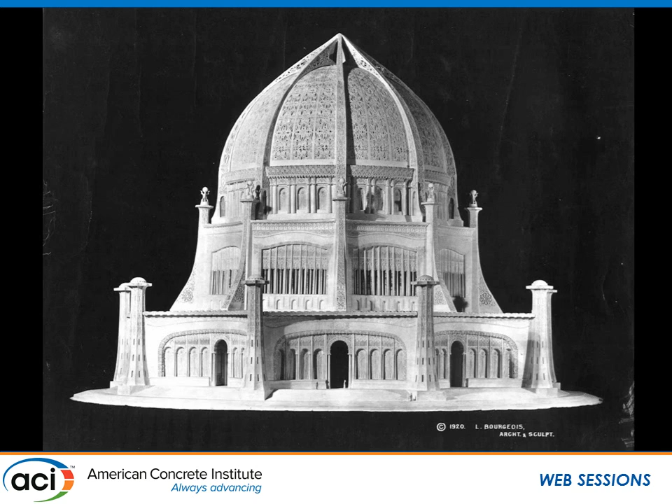Well, they had an international competition. Now, there were less than 1,500 Baha'is in all of the United States 20 years later when construction began, but that meant nothing to this very bold group. They said, we'll have an international design competition. And this model, 10 foot tall, was one of the submittals.

Louis Bourgeois, who was a French-Canadian-born architect trained in Paris, took 2 years to build this because he didn't think his drawings conveyed his idea. What he designed was a single high domed space with light streaming in during the day through tens of thousands of filigreed openings and then out again at night from lights within.

Now, it reminded me a little bit, when I saw Lorado Taft's photographs in his smock at dinner, his artist smock. Louis Bourgeois was much the same, artist, architect, and so his photographs have him in the artist's smock and so on. But John Earley would have greeted him at the door of his studio in his artist's smock because John Earley was a practicing architectural sculptor.

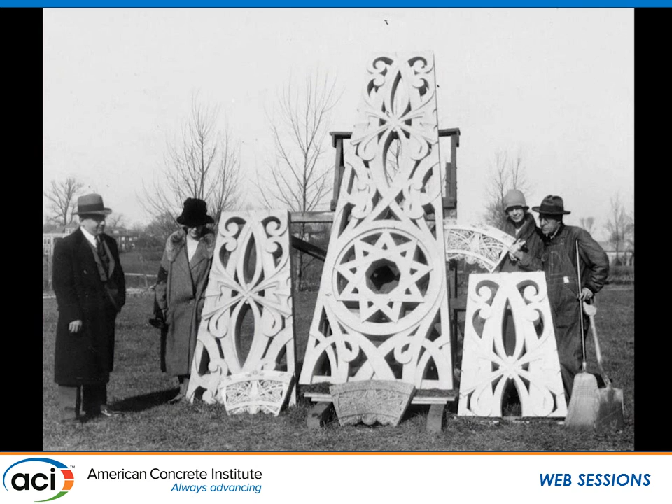Well, only one of the firms could provide a full-size piece. Guess who? John Earley. The terracotta piece was less than half the size. The cast stone piece was not nearly long enough. The 9-foot pieces required couldn't be done by anyone else other than Earley with his reinforced concrete.

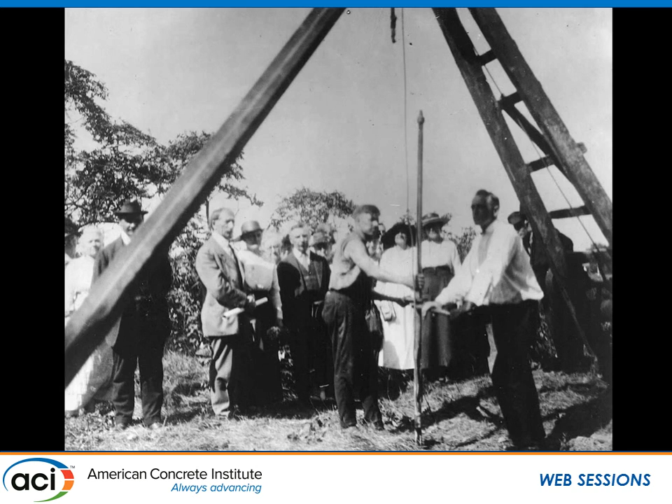Meanwhile, the Baha'is began with the construction of the foundations and the basement level. And these were the days back in 1920 when they had to bring out a little steam donkey engine to run the dewatering pumps. And this hoist, they manually dug 9-foot diameter, 127-foot deep caissons down to bedrock for the foundations. So these guys were there, there's Bourgeois in his suit with his rolled up drawings. Ever the architect.

Now, it was another 10 years before they could begin the work on the building because the Baha'is had to raise the money. Meanwhile, Bourgeois began to draw in his studio for the ornamentation. He did 63 full-size drawings of the exterior ornamentation on the temple. The largest is 120 feet long, 6 feet wide, going up one of the ribs. And these were beautifully drafted.

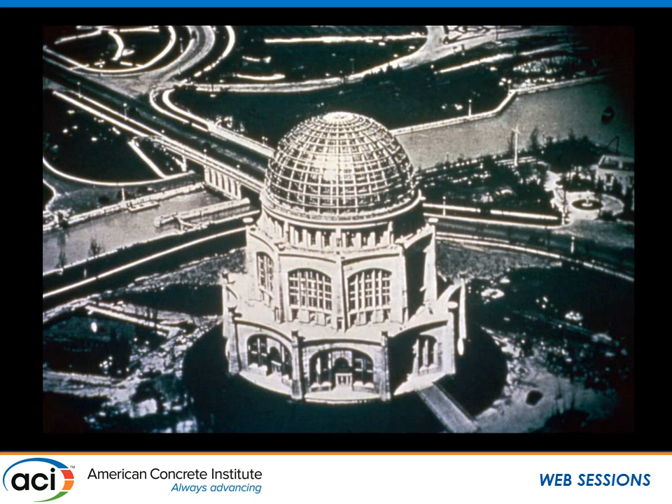1930, the Baha'is had enough money that they could then build the superstructure. The leading structural engineer on the materials committee and who designed the basement and foundations, Major Henry Burt, was the lead structural engineer for Holabird & Roche in Chicago. He had done the Chicago Tribune Tower, the Palmer House, Chicago, the Soldier Field stadium.

At any rate, in 1922, they were sitting in the basement, and he said, it's a good thing the Baha'is don't have enough money to continue because it's going to take more knowledge. It's going to take the growth of our industry, knowledge about materials, knowledge about construction, in order to be able to build this. So in 1928, he passed away. In 1930, Louis Bourgeois would pass away.

The structural engineer who took over for Major Burt convinced the Baha'is, rather than building one story at a time and putting a temporary roof on, as was often done with churches, let's build a complete watertight superstructure, windows, heating, electrical. That was a complete building, no ornament. And he said, then we will ornament it.

The Baha'is said, can we do this? Who's done it? He says, well, no one has done this yet, but much as they take Madam board member and create her dress on a form, we can create the dress for this temple on this superstructure. So they built the superstructure. You can see it here.

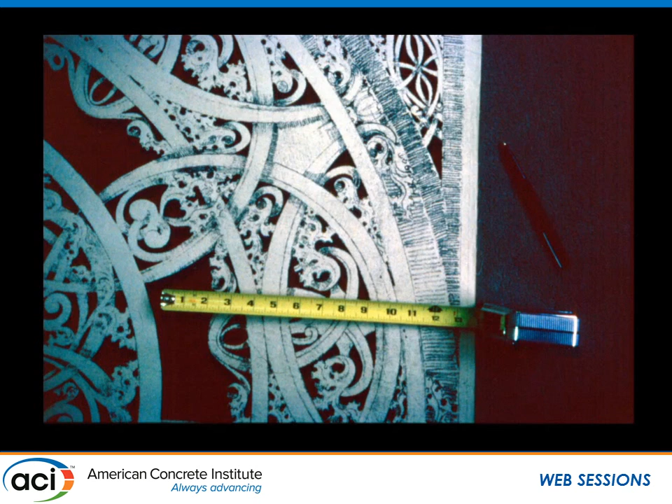And then they had to figure out, how do we get Bourgeois' drawings into 3 dimensions? Well, it really was John J. Earley's genius as an architectural sculptor that made it possible. He had to translate everything into 3 dimensions. He had to decide how much perforation there should be in the ornament, how deep should the relief be, so that, as he put it, if the openings were too large, they overwhelmed the tracery. If they were too small, it became too dark.

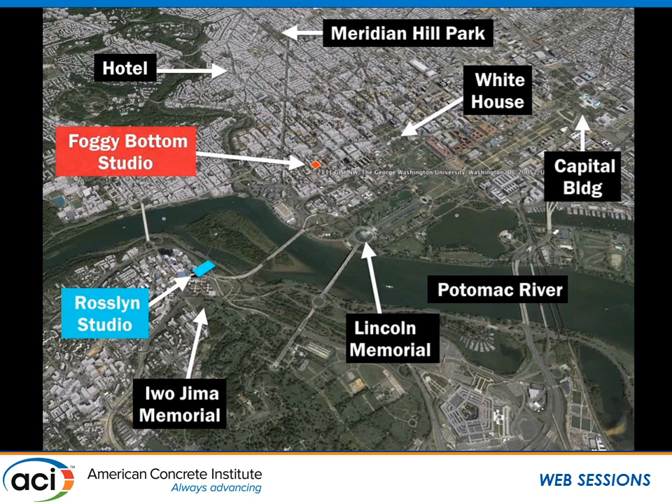Now, their new Rosslyn studio is down in blue. We were able to locate it on the old maps, actually, close to the Iwo Jima Memorial. It was larger in size. They kept the Foggy Bottom studio going for 4 years for a lot of the fine architectural detailed work. But the first thing that Taylor built was the modeling and mold-making studio building.

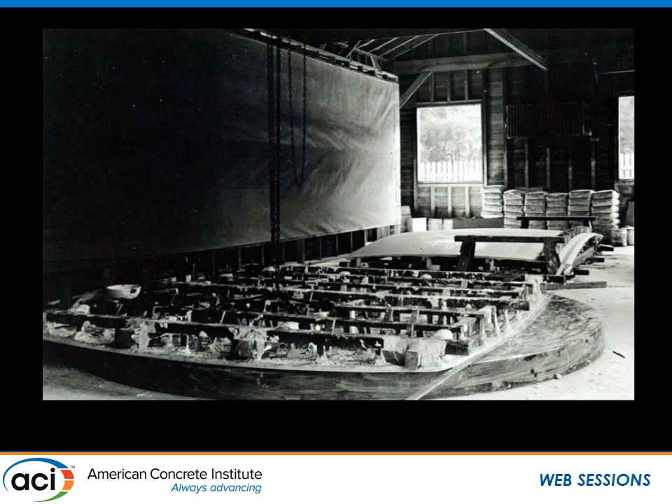And they began, and you can see the sculptor laying out, you recognize that pattern, it's from the Baha'i temple, the clay on there. To control the geometry, Taylor worked from the back of the dome and used that hemispherical shape to control every bit of the geometry. There were, by the way, less than 20 dimensions on the architectural drawings that defined this whole dome. Not because they couldn't put more, but that's all that was needed. This was an elegant design geometrically.

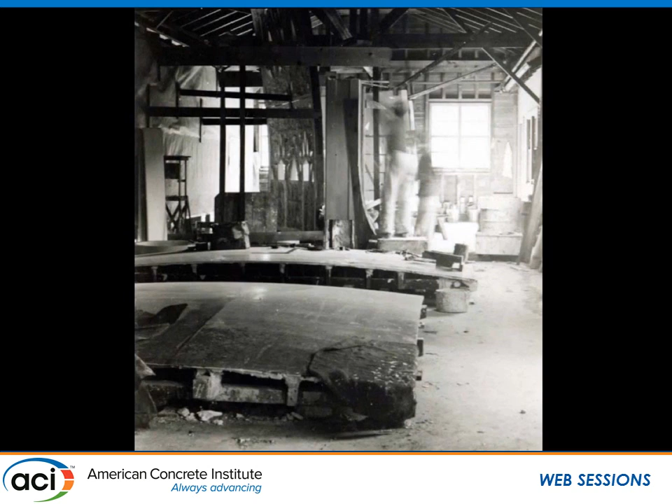Difficult to build. So here you can see some saucers of plaster on the floor. Those represent the back of the precast concrete panels, and they are casting curved base plates for the models. And then in the studio, they would either put the model up vertical or leave it on the floor, and they applied 4 inches of clay, sculpting all the relief and the detailed ornamentation.

Here you can see a part for one of the rib pieces. It would eventually be precast and 3-sided. First, they started with that curved base. They knew that curve was going to fit on the building. Then they built a wooden interior template and applied all of the clay modeling. What you see in the bottom is a plaster intermediate.

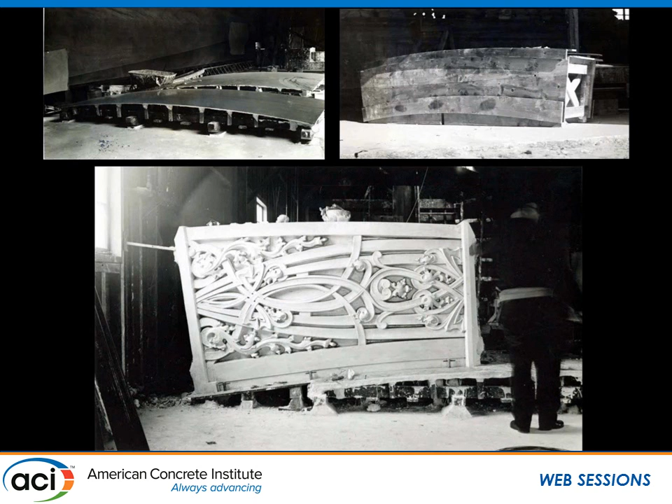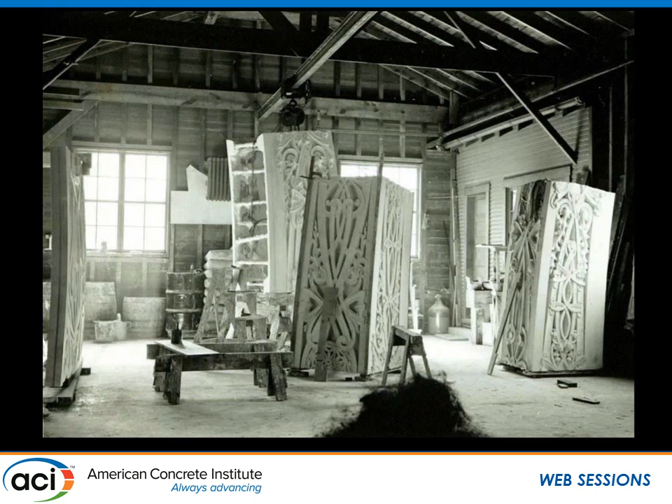It took multiple generations of a plaster mold from the clay model, and then they refined the mold. Then they made a plaster model from the plaster mold. They refined the mold, cleaned up the joints, and finally they would make a mold for the concrete. But that plaster model had to be exactly the size in 3 dimensions of the precast they wanted in the end. Here you can see a number of the rib pieces in their modeling studio.

Now here's the team. John Earley is not in these photographs. He's only in a few photographs, and I believe it's because he's the one behind the camera. He would have been the one that would have been up on all those things. And so all these photographs, I think, were taken by John Earley.

Earley and Taylor were members of the Plasterers Union, and their studio remained a union shop, and this let them hire additional skilled craftsmen and artisans as they needed it, whether it would be here in Washington, in Chicago for the Fountain of Time, in Nashville for the Parthenon, so they really could take standard methods in the craft of plaster and art sculpting, architectural sculpting, and apply them.

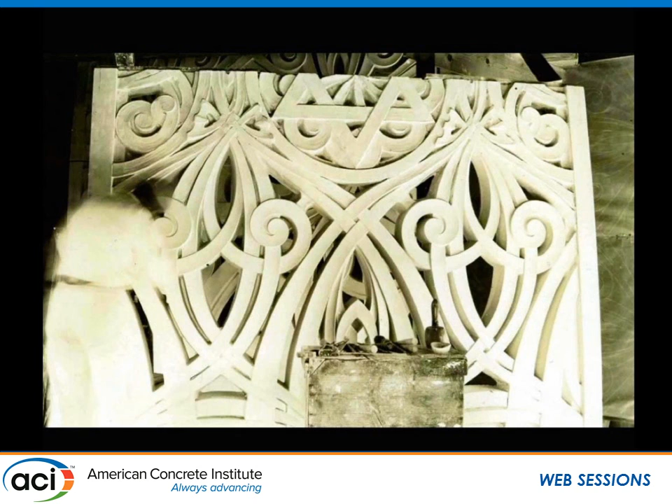That's because Earley would take precast elements. They were coming from a background of cast stone, smaller masonry size elements that were set into the architectural facade and set with other stone, mortar, bricks, what have you, and placing it in this concrete structure, and they kind of glued it all together by casting additional exposed aggregate concrete along between the pieces.

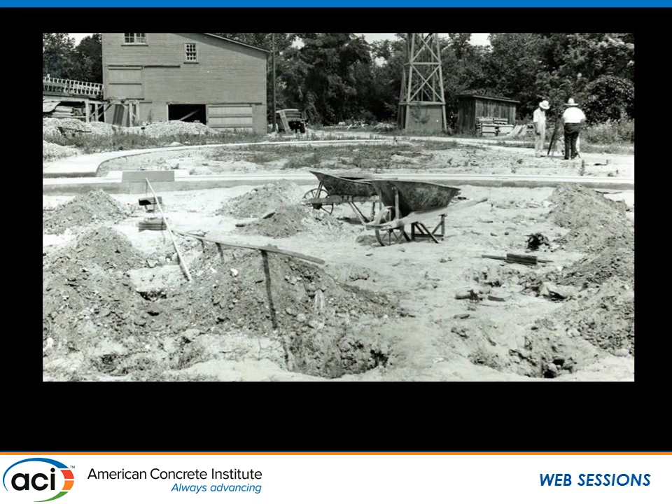While the model making was underway, Basil Taylor, and that's him on the right in that great cowboy type hat, by the way, he's out there surveying, pouring concrete slabs for the base of a full-size template mock-up of 1/9 of the Baha'i dome, so that they could match every piece they had to make up on that.

He exactly modeled the purlins, all the trusses. He knew where every piece of the structure was, and that was in wood. On this, they began to install the plaster models for what would be precast pieces.

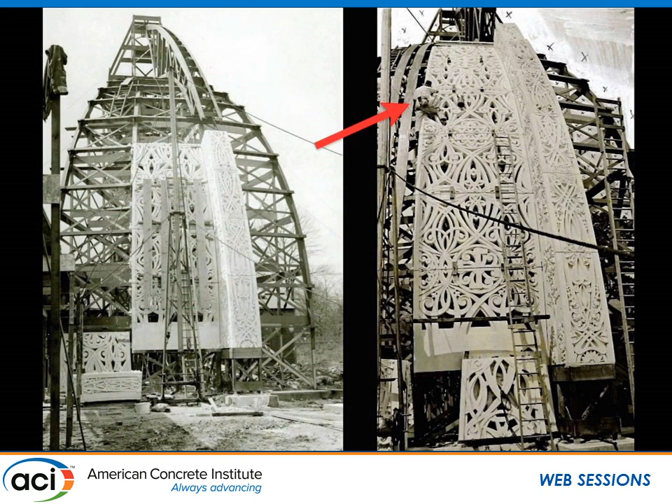They hoisted them up, anchored them onto the purlins, and you can see on the right how thin these pieces were. Then, as they built up more and more pieces, they would go up, and you can see where the red arrow is, one of the artists up there refining the joint. The joint between pieces is 3/8 of an inch wide. It's an open joint. And he's refining the movement of the ornamentation across from one panel up to the next to make sure that the planes, the arrises, the relief, all is consistent.

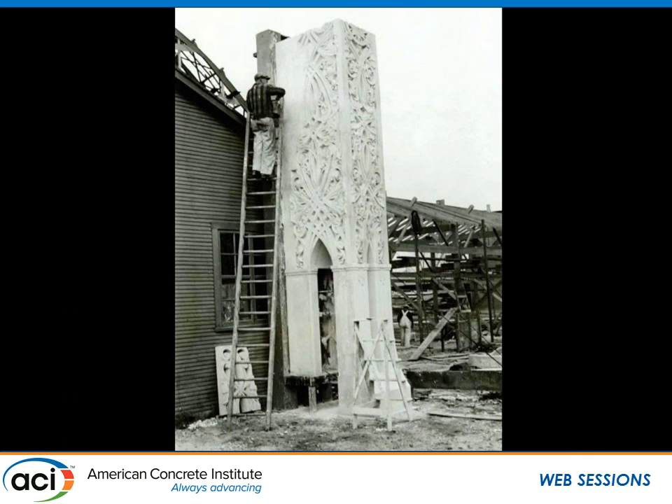Here they're modeling the rib that will be at the base. This goes from the roof up into the dome, the base of the ribs. If you look in the background, though, they're doing that on the outside of the modeling studio on the left. In the background, you'll see they're building something. This is the casting yard. So they were well along with their mock-ups. You can see in the background that tall dome structure and the plaster mock-ups on them when they were still constructing their casting yard.

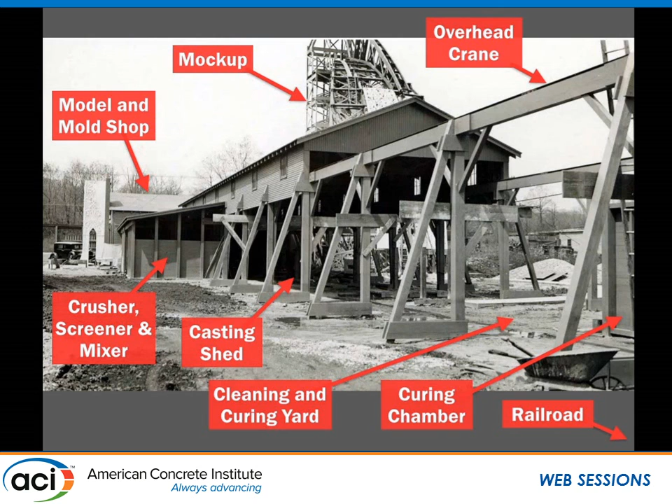The casting shed was under roof, but it was open air. Then they hoisted and rolled things out to the cleaning and curing yard. Taylor built a curing chamber in the middle of this 350-foot long crane runway with a canvas roof that he could roll back and roll up. And of course, at the far end of the runway was the railroad yard, the railroad siding.

This is the mold that they would finally construct. This is for one of the panels on the dome. They had, I think it was 27 unique pieces, but because they repeated up to 9 times, that was the economy that they were able to achieve. If you look carefully, there's a shiny edge in the foreground edge, like a shiny lip. That's the edge of the lead foil, and it was almost a foil, such a thin sheet that they could mold it to every little sharp arris of the mold.

In the Parthenon in Nashville, the building itself is the biggest piece in the museum, but they do have some molds left, including a piece of a column mold, and it still has the lead foil on the inside. And I don't know if they used size or shellac to initially bond it, but they would shellac them when it was done. Every one of those knobs in the middle is a removable plug that keys into the base background mold, but freely comes out when the concrete piece is removed, because otherwise they could never get the concrete piece out. The sides all unbolt and come off. There are more than 50 pieces in this one mold, and yet everything fits together precisely.

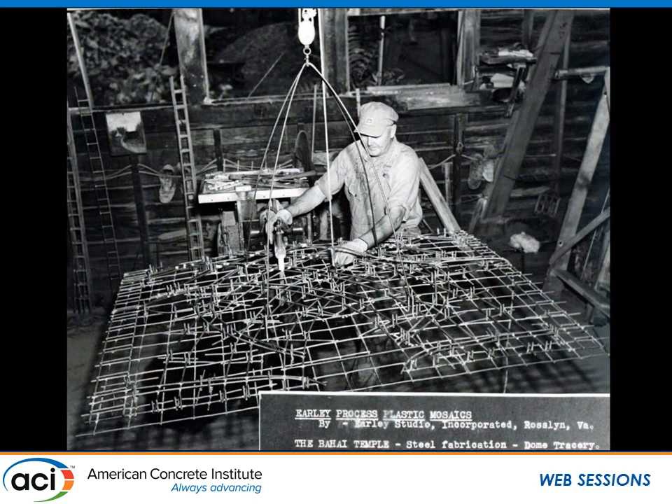Here they're making the reinforcing steel. This was less than 1/4 of an inch diameter steel rods, and they spot welded them all together following the three-dimensional curves of the pieces, maintaining a 1-inch cover or distance back from the surface. They did it beautifully. On that whole building, we found less than a dozen spots where the reinforcing was a little close. They then hot dip galvanized the reinforcing, but the critical element was the pebble, the aggregate in Earley's Mosaic concrete. And here you can see some of that.

Well, the aggregate was slightly less than 1/4 of an inch in size, and after the first job or two, when Earley said, I need it this size, no larger, no smaller, well, no one would supply them with any screened aggregate at all.

So Earley had to build his own crushing and screening operation. By the way, the sizing for this was: their pebble aggregate was minus 1/4 of an inch and plus a number 8 screen in our current Tyler series. The sand, and

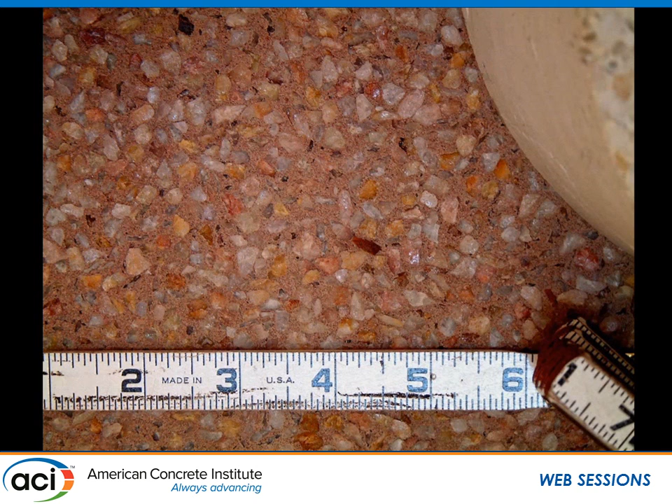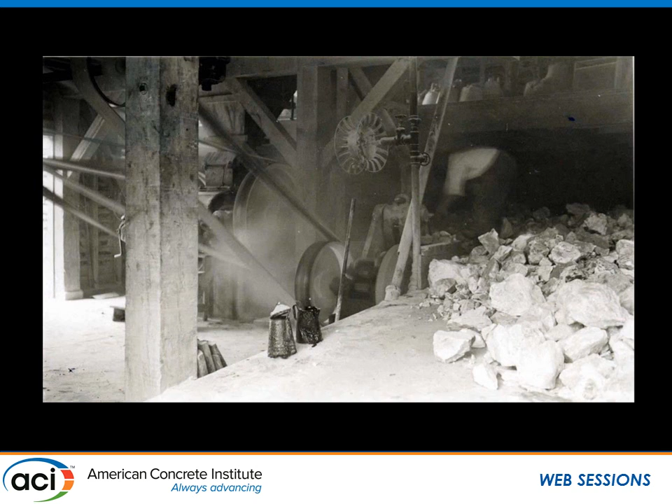When we first began restoring the Baha'i Temple project, we didn't realize how precise that sand had to be, and we did a lot of samples before we finally got the right appearance. He had trainloads of rock delivered directly to his yard. He selected it by hand for color, for quality, sorted it, took it by wheelbarrow to his crushing equipment. He had a 10-inch jaw crusher and a 12-inch roll crusher, a series of screens and recirculating belts in order to take the middle size and crush it again so he could reuse it. And he achieved a 60% yield, which is very high for aggregate in the processing.

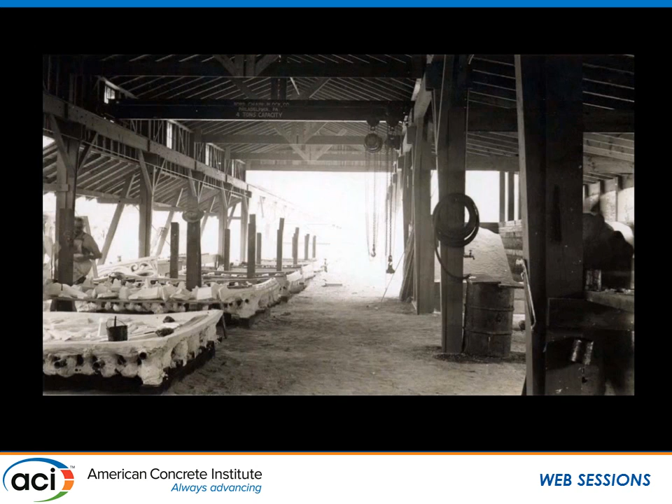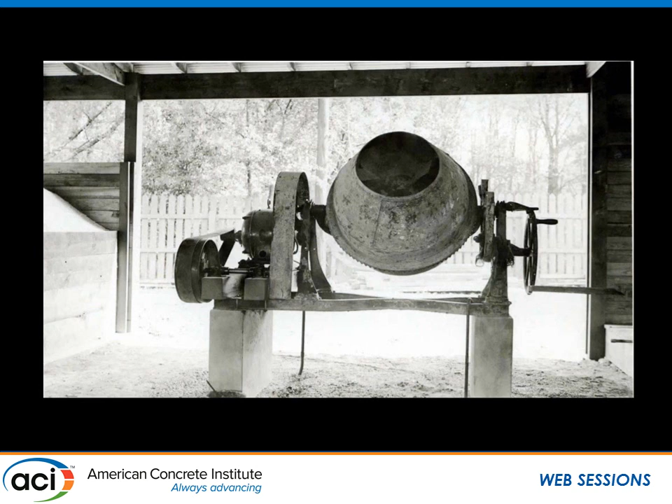This is in the casting shed. On the left, you can see the molds laid out, getting ready for casting. In the center is the crane runway. On the right, you can just make out there are bins of sand and pebbles. And what you don't see is the mixer. I say the mixer because this is the mixer that was used for the whole Baha'i job. It's a 1-bag mixer, and Earley's proportions were 1 bag of cement, 110 pounds of his sand, 300 pounds of his pebbles, and from 4 to 6 gallons of water.

Why 4 to 6 gallons? It depended on the shape of the piece. It depended on the access they had to get water back out, whether they could use a porous core, all of that. As he put it, at the time of curing or set, we want about 4.5 gallons or less of water in that mix, which would be about a 0.38, 0.4 water cement ratio.

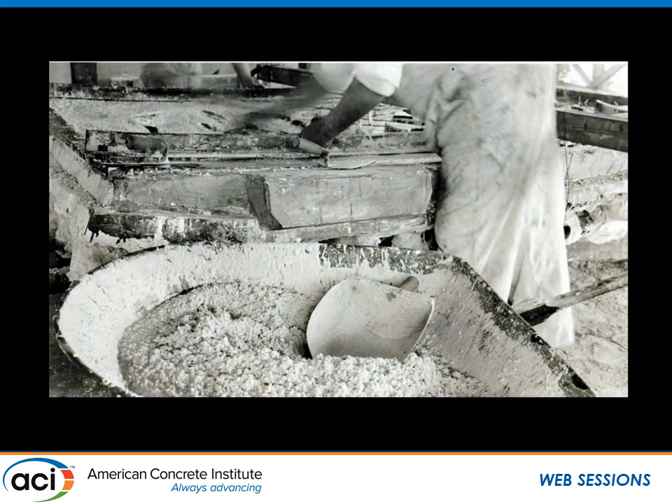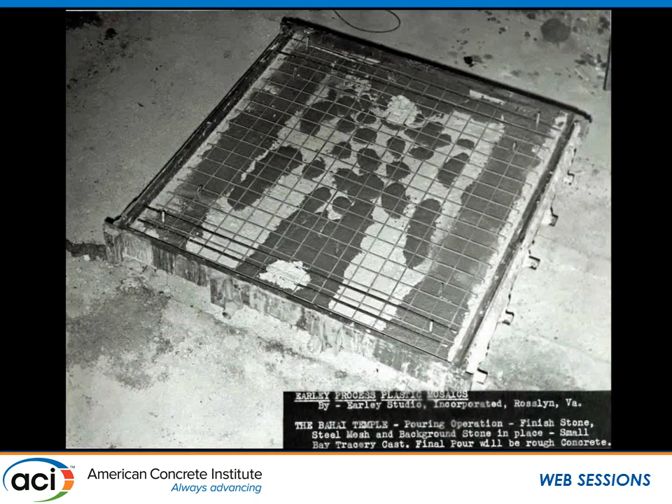This is what the mix looked like in that wheelbarrow. Very coarse, very harsh. When we first tried this, we said, well, you got to be joking. How are you going to put this in a mold? Before we got this photograph and saw that is what it looked like. And up above, you can see a margin trowel on the edge of the mold. That's what they placed this with, margin trowels and sticks. They tamped that in by hand, every corner, every crevice, working the pebble down to the surface. Once they got the face mixes on, they put the reinforcing steel fixture in and placed the backup mix.

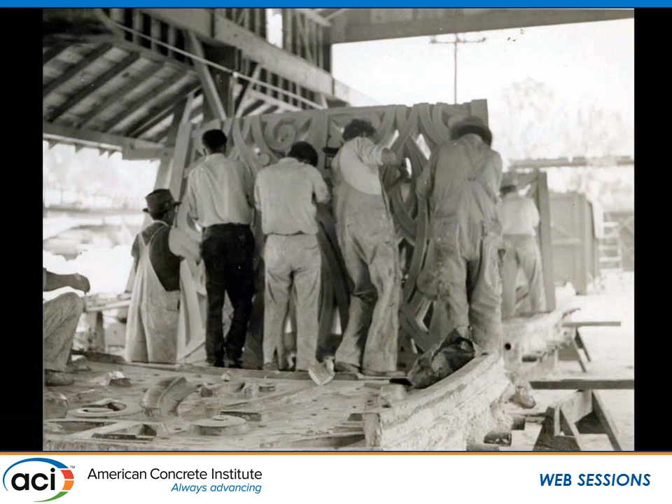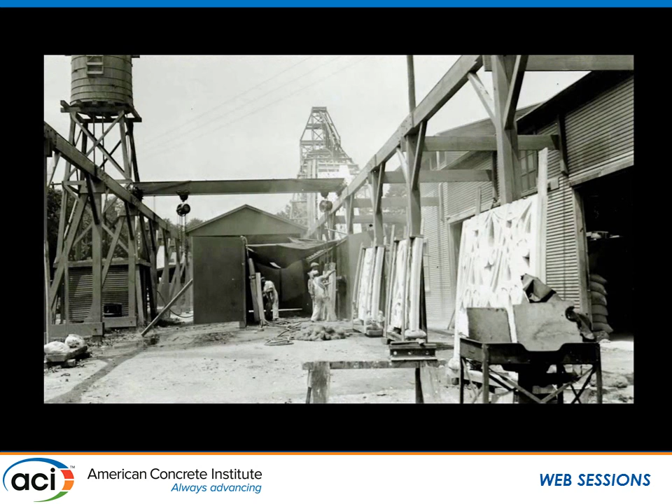The next day, they had 40 minutes to expose that panel once they got it out of the mold, before it was too hard. And they had to use wire brushes, like an artist's brush, smaller than a toothbrush. So they had everybody in the shop, the crushing guy, the delivery guy, everybody over to do the exposure. But they got crisp, sharp results. They brought it down in the yard for curing, staging. They gave it 2 acid washings, not to expose the aggregate, but just to clean the cement film off. It was a dilute acid mixture with water.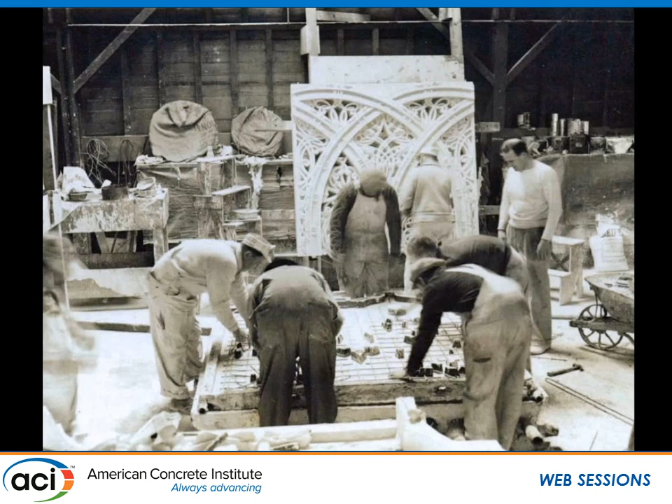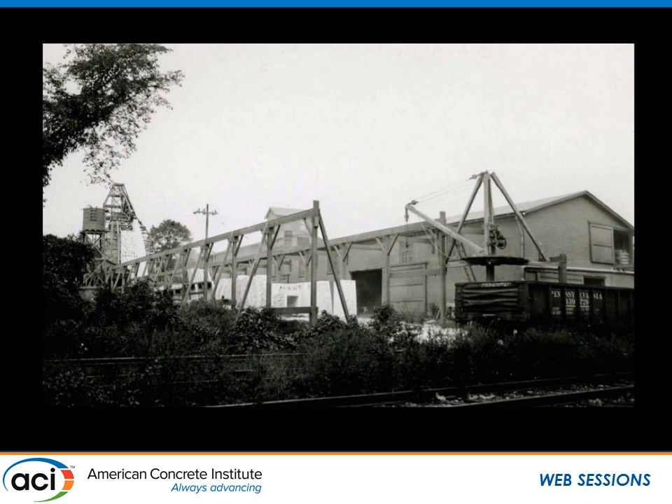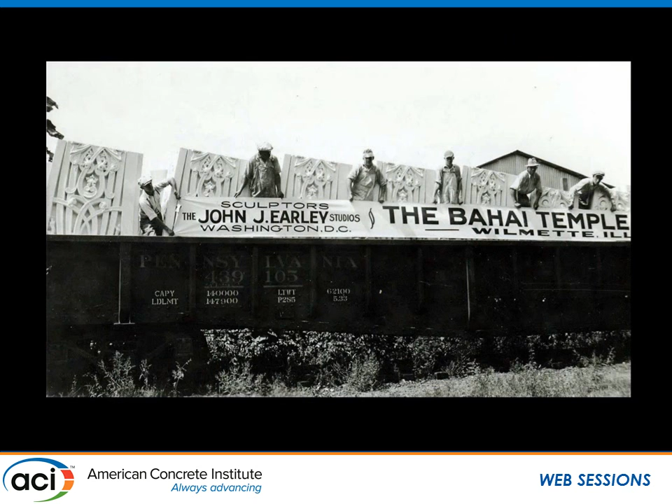They had the challenge of putting that puzzle of a mold back together the next day after cleaning all those 50 pieces so that they could make another piece. They brought it down to the end of the yard. They had a derrick to the railroad siding, loaded it, shipped it up to Chicago. They knew how revolutionary this was for the industry at that time. They hired a local trucker to bring it over to the temple. That's Basil Taylor in the light-colored suit on the right. Here they are with some of their first deliveries.

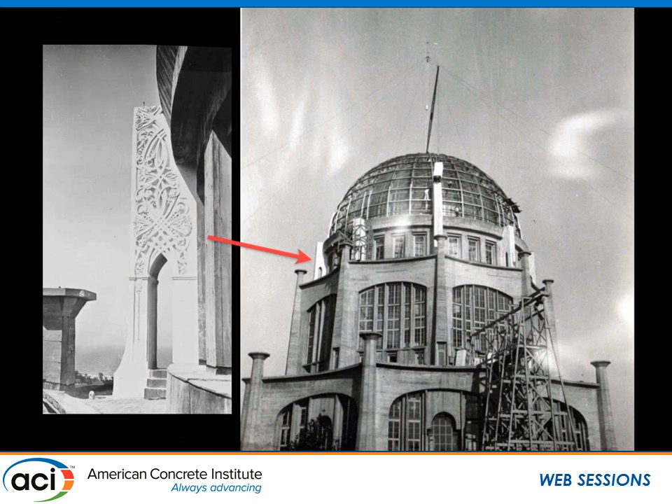John Earley taking a photograph of everybody there. Most of these workers were plasterers hired from the local Chicago Union Hall. The first work, though, was cast in place. The base of the ribs was cast in place on the building. And over on the right, you can see that rib in place up on that high roof. And then they're hoisting up the precast panels.

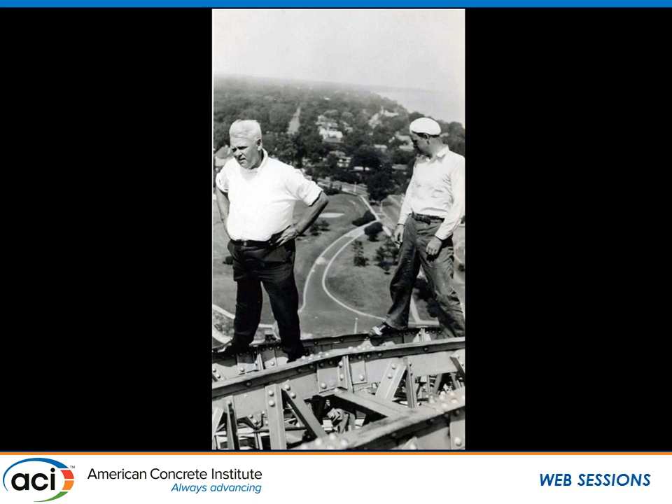Now, Basil Taylor on the left feels perfectly in charge. The guy behind him has his doubts, I would say. And here you could see that they actually rode the pieces on the derrick getting up and down off of the building, something that we would never be able to do or want to do today.

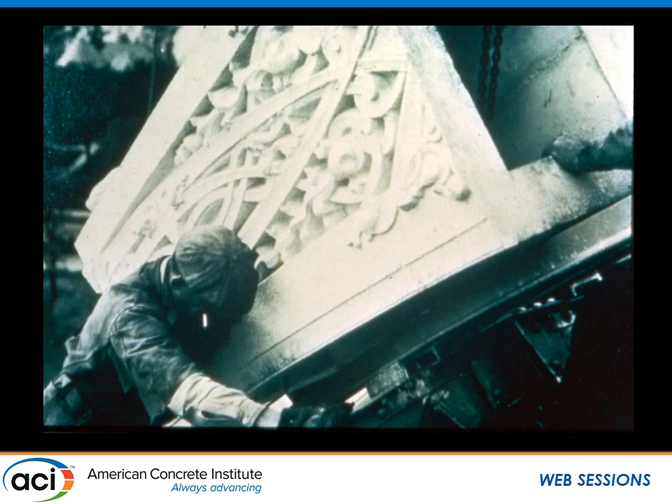Now, this photograph, you can see a little reveal down towards the lower part of the edge. They took T's, and that's what the panel is resting on, a T-section, inverted it so that the standing leg of the T radiated outwards from the center of the building. And that was the place that the panels rested on. They built a reveal in the panels to keep a 3/16 inch open air around the panel on all sides of the joints. But they finished the dome, really one of the first architectural precast concrete projects.

They went on. It took 17 more years of steady work to finish the job. Using the same techniques, here they cast the soffit in place on the building. You can see the model on the upper left. There are molds there, and they sequentially moved them around that big cornice. The lower photo is after we restored it.

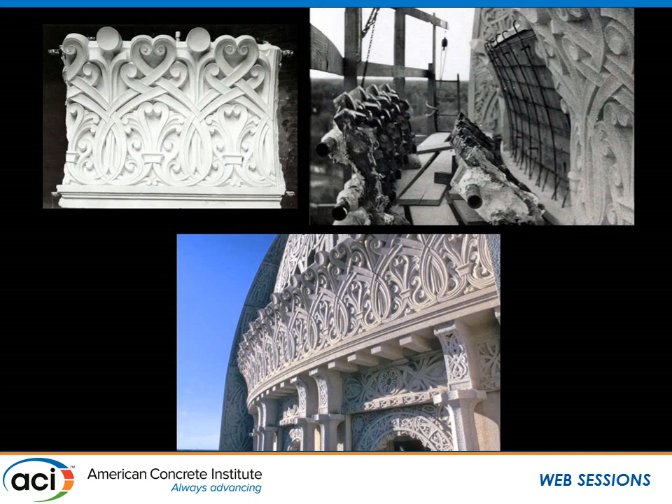Most of the restoration, by the way, was not correcting material problems, but correcting flashing and roofing problems. Like most monumental buildings, there was no precedent. And with that scalloped edge, they buried the flashing and water got in. What's often surprising is they cast many of the exquisitely ornamented pieces in place on the building, shipping their quartz, pebbles, and sand and molds.

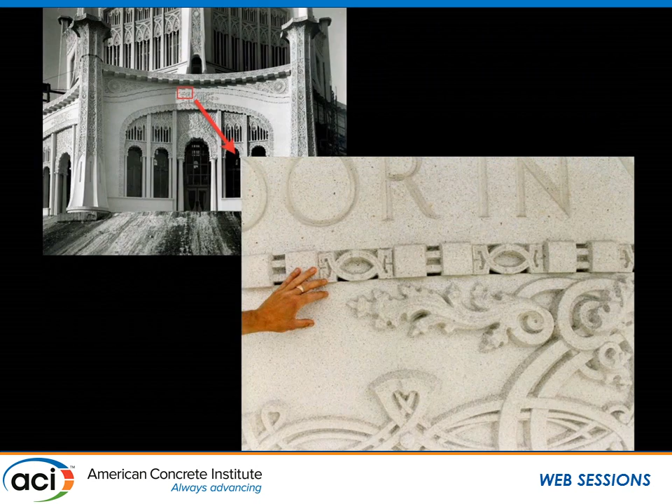This, I wanted to show you how fine and delicate it is. That is, on the right, that is a precast piece. It's out in the gardens, but it's from one of the window panels, the filigrees. That is only 2 inches wide at the narrowest area and 2.5 inches thick, but it has 1.5 inches of depth in the shallow relief to create all these shadow lines and ornamentation. And the building is full of this. Even up on the very top of the dome where you can't see it unless you're up there doing maintenance, they have berries and acanthus leaves and everything perfectly detailed.

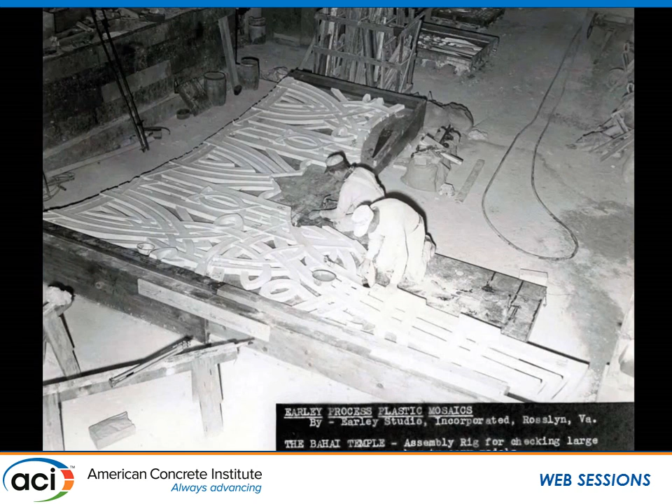The interior, the Baha'is didn't think they could afford Earley Studio, who did the first project, by the way, on a time and material basis. They gave the Baha'is a very detailed budget for 5 phases of work, and they followed that, and their budget was actually right on target, even though it took 15 years.

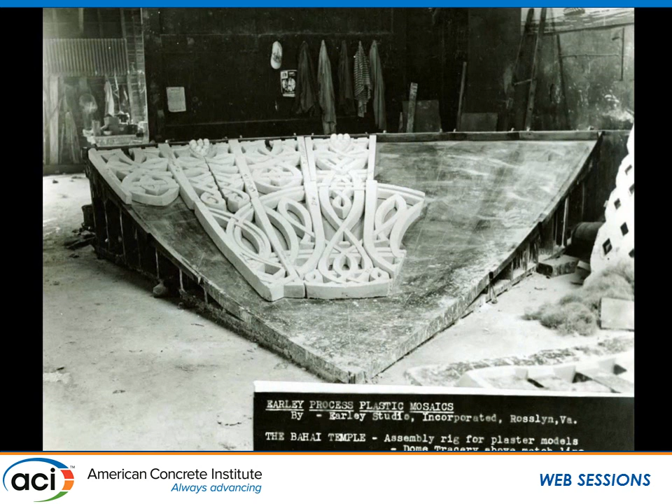For the interior, the Baha'is got bids from ornamental plaster studios. Earley said, well, you've got to give us a chance. Now, John Earley had passed away, but Basil Taylor was in charge. Basil Taylor prepared a budget, and it was lower than the plasterer's bid for plain white plaster to do multicolored mosaic concrete precast. They used the mock-up in their studio because it was a smaller scale.

Same process. They hoisted scaffolding, suspended it actually to create a false floor as they put the dome pieces on. But the result is definitely an architectural breakthrough, an engineering breakthrough, and certainly for our concrete industry a breakthrough. So please visit the Baha'i Temple when you're in Chicago. You can reach it through the public transportation and enjoy it when you're there.